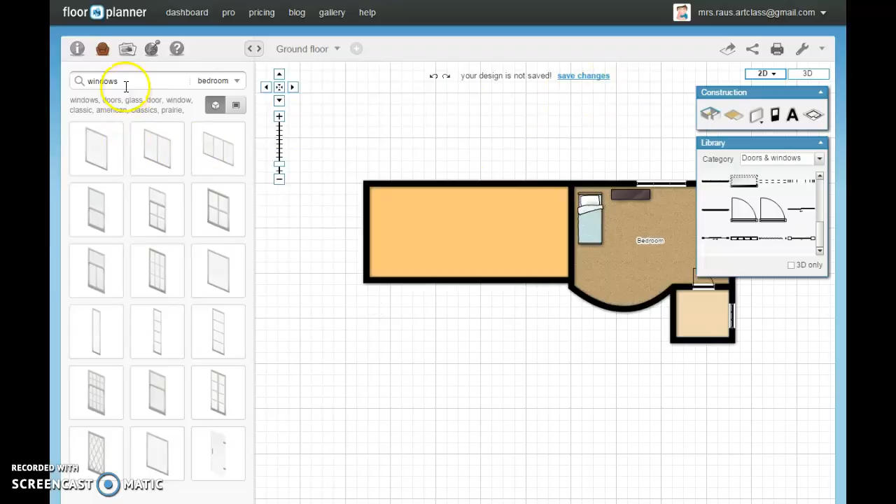So now I'm going to go ahead and add doors in here. I want this to be something kind of interesting, so that when people walk up to my house they see, and let's put doors right here. Big, nice front doors.

Now let's go ahead, something you're needing to do is learn how to do draw surface. If you have in any way lost the background back here and there's a grid inside of here, then draw surface is what you're needing to do. Sometimes the background will go away, and draw surface helps you define that space a little bit. So let's go ahead and type in here and say living room.

All right, so I'm going to go ahead and type that here. Next, what I need is to make a sidewalk. Same thing, I'm going to use that draw surface again. I'm going to take this and draw surface to make a nice sidewalk in here.

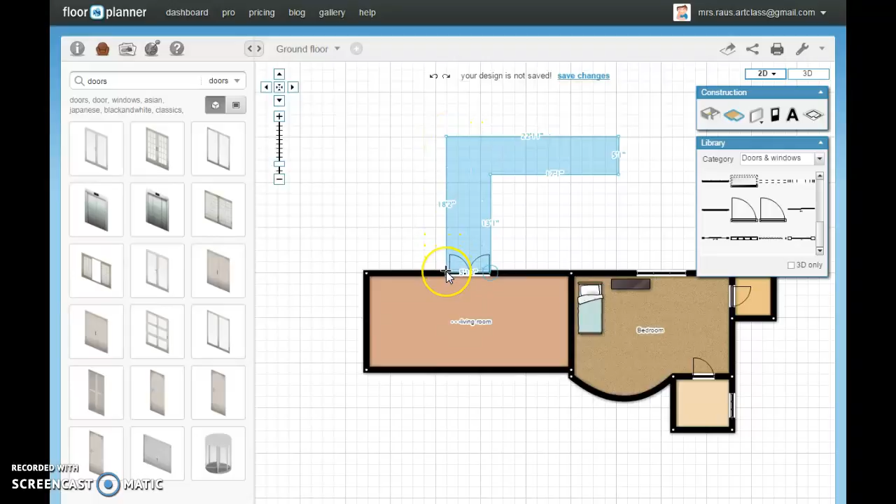The draw surface tool, I find students usually need a little bit of practice with, so be patient with it. The trick to this one is to double click real fast whenever you want something done. So I'm going to go ahead and double click and change it to stone, so I can kind of see that it's my entryway.

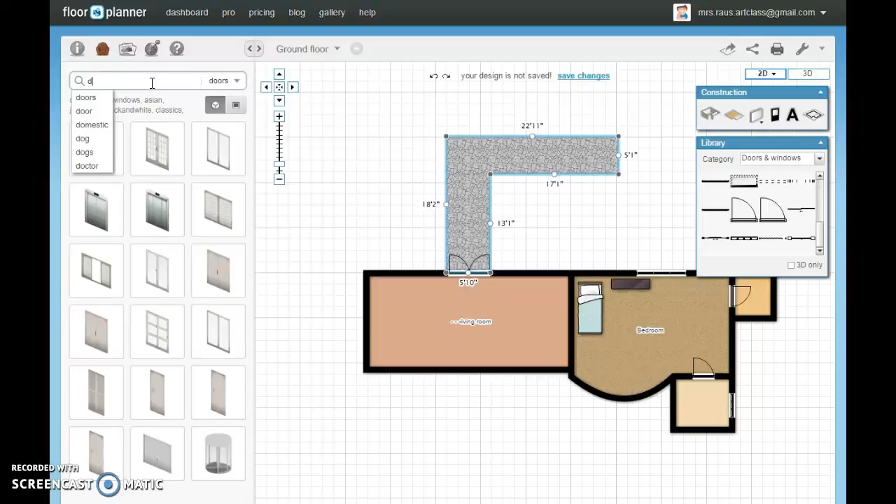Now this is kind of saying, hey, welcome, walk into my house. This is how you get into my house. And from here we're also needing some other type of landscaping. Let's go ahead and put in some trees. So I can go ahead and put a tree in here.

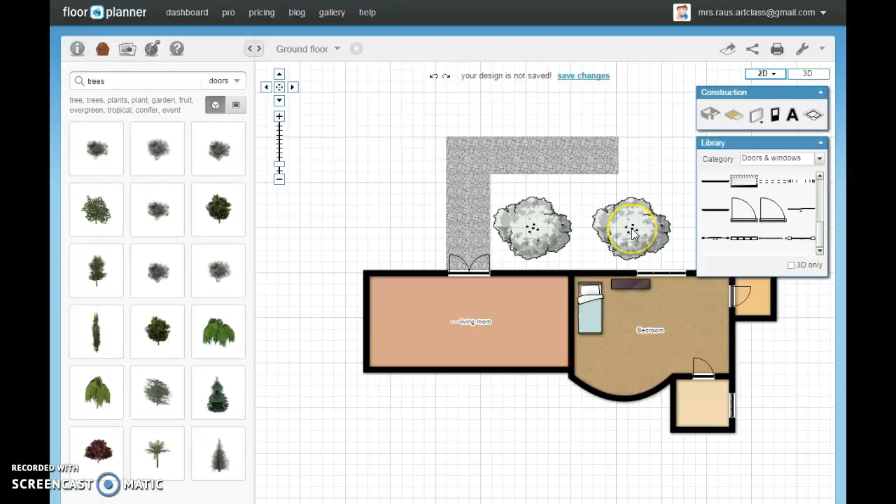Now that tree is quite large for that space, so if you haven't already tried it, you can make them smaller so that they fit the area. Some other things you can do is copy and paste. So let's say I want 2 trees, I'm going to make another tree on the other side, so I have some trees in front of my home for some shade.

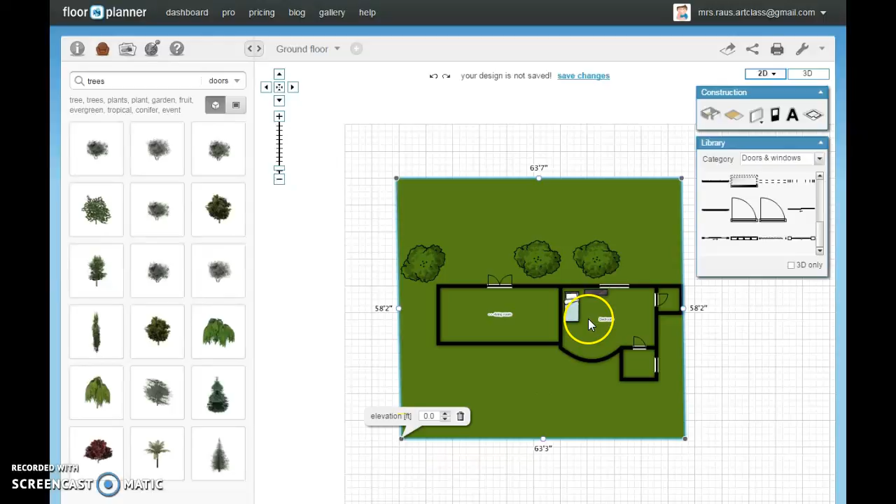And if you wanted to rotate that just a little bit, do some other landscaping decisions, that's perfectly fine. Let's go ahead, I need some grass on the background of my project. Now if you go ahead and try to put grass in behind everything, this tends to be problematic. Let's go ahead and show you. Now it's taken away all of my carpeting, any rugs, it kind of wipes out a whole lot of stuff.

So the best way to do this is instead go ahead and draw your surface. You can take this and make it in as big of sections as you can. You can go ahead and connect these as you go around. Let's take this all the way out to the other end here. I'm going to go ahead and double click this and end.

You know what? Mrs. Raus messed up on that one. I'm going to delete that. That happens quite a bit. You can hit delete or you can hit the little trash can there. So let's go ahead and give that another try.

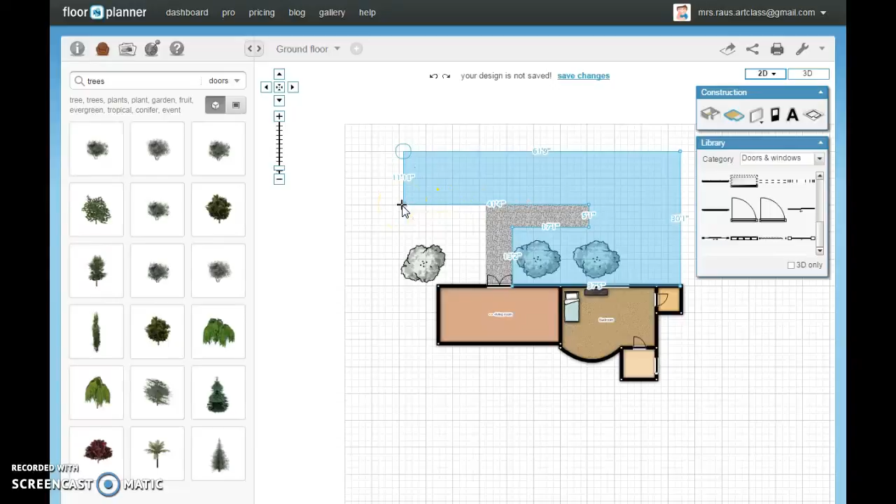Like I said, this takes some practice. So I can take this and go around, connecting my corners, going around things. Okay, we'll stop there, and that's my grass for the background.

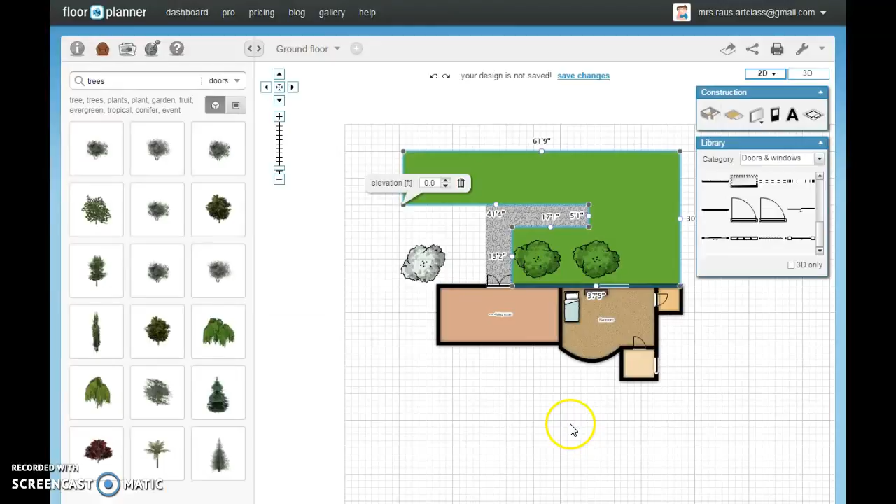But the bulk of your project should all be spent with your budget. So please go back through and think about where you can add to your home. Some of you are going to have no problem spending money, and others of you are going to find that it's a little bit more difficult. If you have built every single room big and you have nothing else to spend, I recommend maybe downsizing some of your rooms.

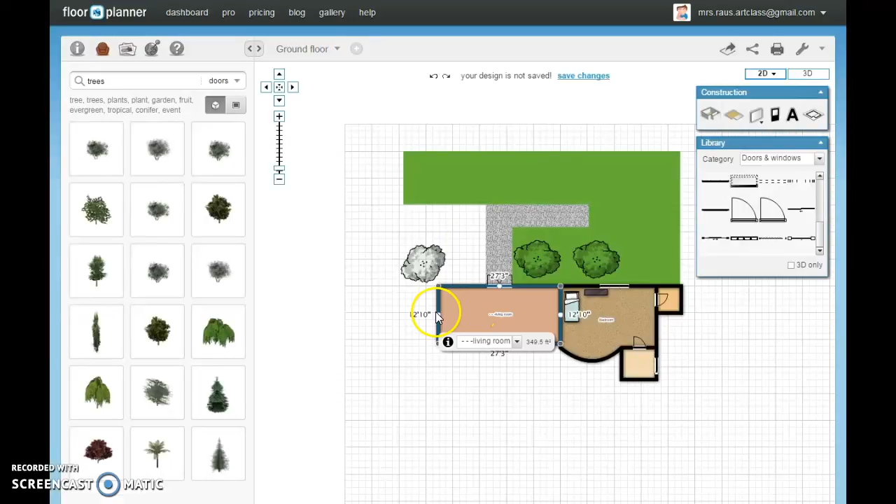So let's say this one, I don't have any money left, so I want some more money to spend, so why don't we go ahead and take this wall and move it in some. So there are ways you can still work with some things. Now I just got some money back. I need to redefine that space.